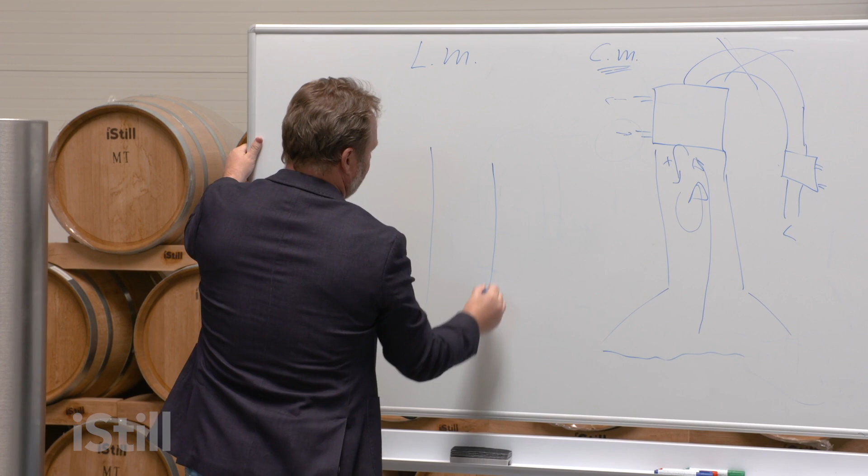What we basically did is we got rid of this whole gas throughput phase. We beefed up the capacity of the dephlegmator, and instead of calling it something stupid like dephlegmator, we called it what it is, column cooler. So we have a column, and we put a cooler on top of it, water in, water out.

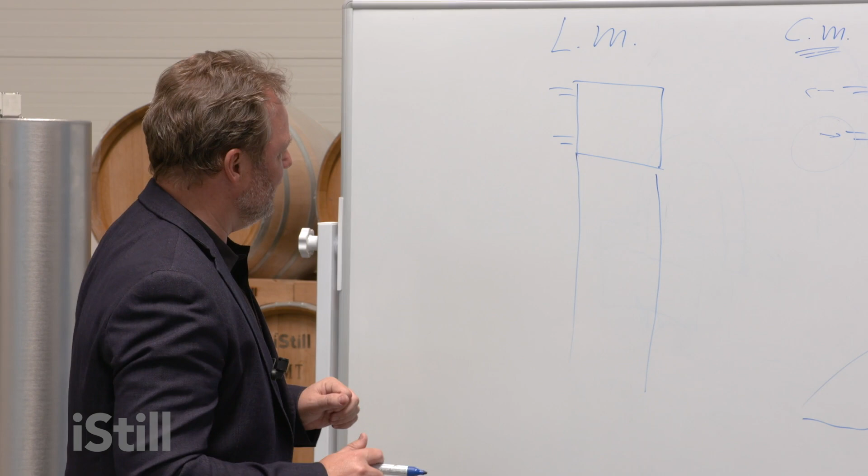And instead of sort of manipulating the water flow and hoping nobody has to go to the loo, hoping that the weather stays the same, hoping that the seasonal influences are minimal or brought under control, however you want to do that, we basically cool all the gases back to liquids. We cool all the gases that rise from the boiler in liquid management, in an iStill, back to liquids. That means that cooling is only essential in the way that there needs to be enough cooling to cool all the gases back to liquid.

How warm the coolant is doesn't really matter. Well, if it's colder, it's more efficient. You need less coolant to cool down all the gases. But even if the coolant is warmer one day or one season than the other, it doesn't have an influence on flavor. And it doesn't have an influence on flavor because we're going to cool back all the gases to liquid. How about room temperature? Variety. Doesn't have an influence either.

Wow, how about pressure? How about somebody flushing the toilet again? This is the last time I'm going to name that example, by the way, and my water pressure drops for 4 or 5, maybe 6 seconds. Who cares? As long as there's enough coolant in the system to cool all the gases down to liquid again, we don't have any variability.

That leaves, if you listen carefully, only one influencer, potentially outside of control, that influences cuts, that influences flavors, that influences vapor speeds, and that influences the quality of the product you can make and the repeatability with which you're going to make it. No more cooling temperature difference, no more distilling hall temperature differences, no more coolant pressure issues. So 3 out of 4 variables, muddiers, are thrown out of the window. We only have one left, and that is air pressure. Remember, we spoke about air pressure being the 4th variable that messes up

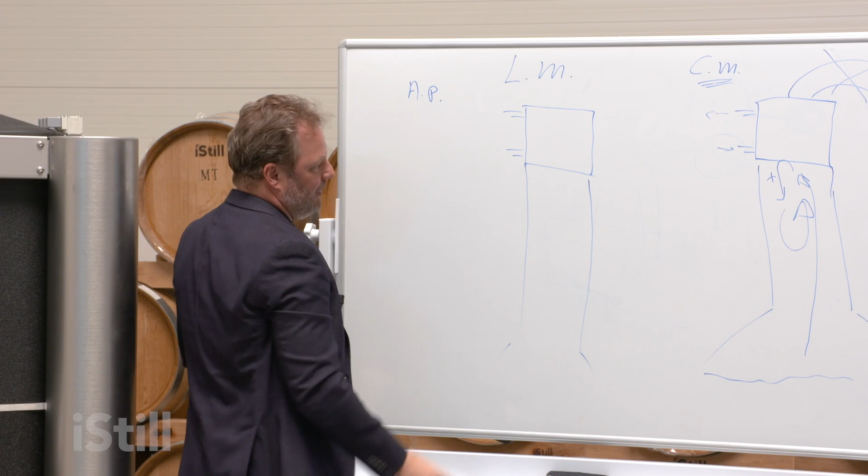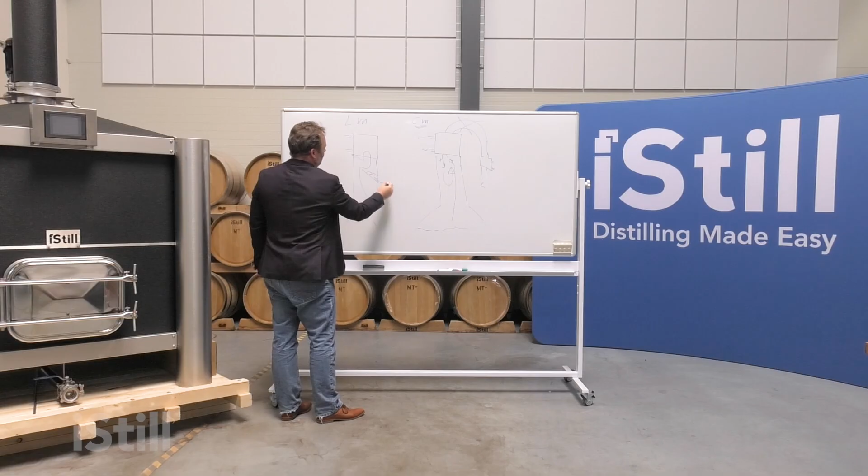All right, gases rise up, hit the cooler, everything gets cooled down. So what we basically need is a system to scoop up the liquids. The gases flow through, and the liquids assemble on the plates. So instead of having gases come out and cool them back, we have liquids come out. And what we pretty cleverly did, if I may say so, is we put a robot here. And the robot closes and opens a valve in the liquid outlet.

Now imagine that we close that robot. No liquids get out, so this plate fills up, overflows, and we get a redistillation the same way we got a redistillation in a more traditional system with cooling management. So all of a sudden, close the robot completely, we get pure reflux, nothing comes out, we can get a very high proof, lot of purity. Push the heads and tails away, make a very pure product like a vodka.

Or we can open up the robot completely. All the liquids that we create go out. What we basically now have is, instead of a vodka still, a pot still. It does one distillation, just like the traditional pot still that I sort of drew before. But the fun thing is that we have got a lot of control over that robot.

What we basically can do is open and close the robot in 2,500 steps between fully open and fully closed, creating 2,500 positions of a certain amount of product coming out and a certain amount of product, reflux, being redistilled for higher proof, better separation, less smearing, more purity, higher ABV. No control issues, no external influencers, basically, and I'm going to show you the unit for a second here.

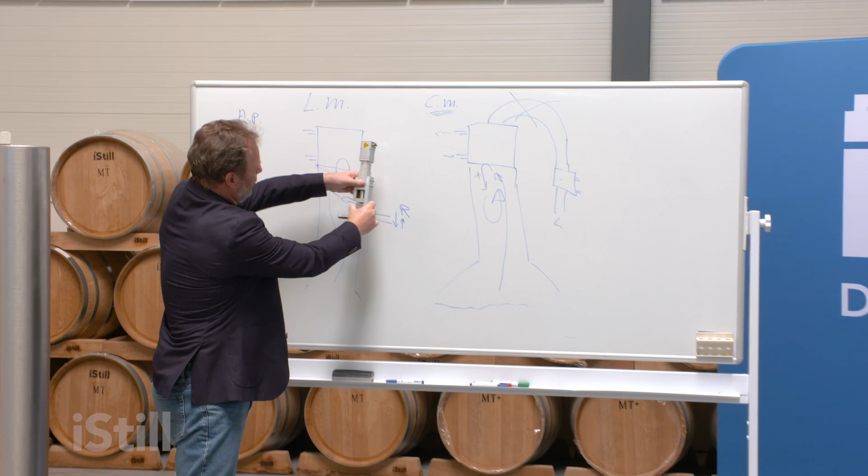A very simple robotized design that sits to the side of the column, and of course it's packaged when you get your iStill in, so you don't really see it, it's covered up. But basically imagine that the liquids flow out here and then go to your product, your cut selector, heads, hearts

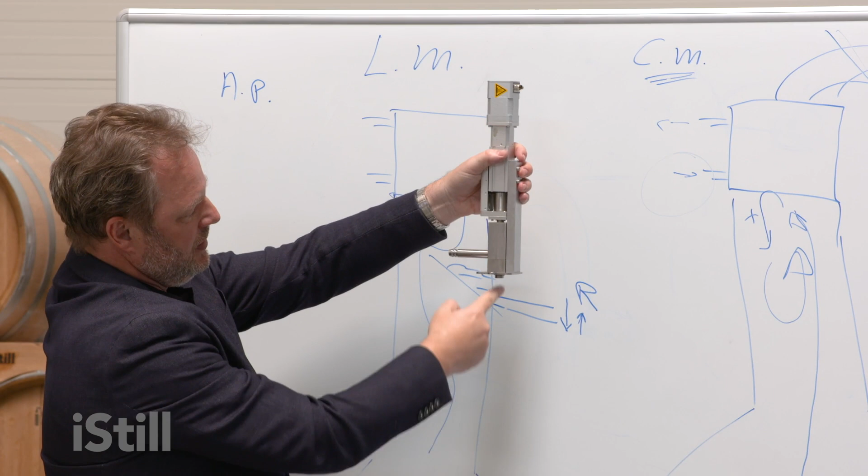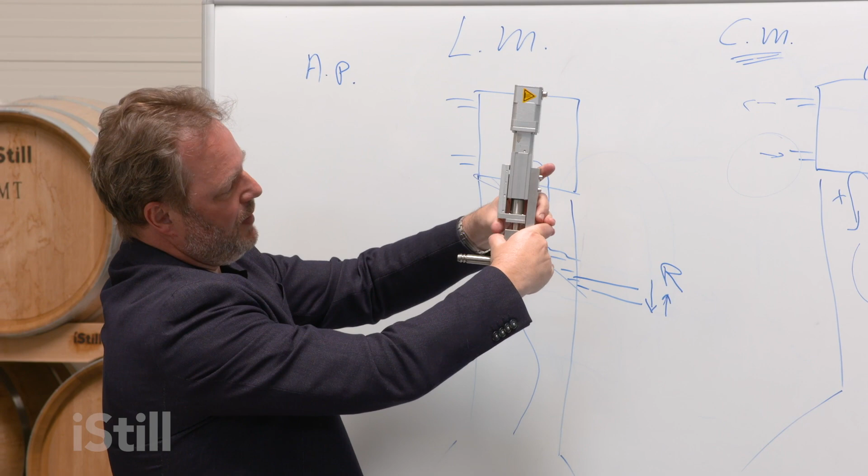and tails. But if we close this or open it, we can actually manipulate in steps of 0.01 millimeters the amount of redistillation we need and the amount of product per hour we get out. So there's a few advantages there. Cooling, water cooling medium doesn't have an effect anymore. So the number of confounders goes back from 4 to 1, only air pressure. So it's easier to create better product consistently.

But also because the robot has such a tremendous range, this will never be a pot still. You need to sort of take the plates out for it to function like a pot still. You need to completely turn this off to have it something like a pot still. This is simply a pot still if you open the robot. If you want to turn this into a vodka still, you need to make the column very, very long for a lot of redistillations, a lot of separation power, a lot of control over the final vapor speeds to make sure you don't get heads and tails smearing and create a one-dimensional vodka.

With this system, you don't have to change anything. The column stays the same, the robot stays the same, but based on your instructions, it will just close a little bit more to make sure that it gets to the purity where it needs to be. So the range in which the liquid management robotized system works, really modern equipment, 21st century, is much wider, much broader. How it helps you target to get the same product over and over again is really ×4 compared to the difficulty of a cooling management system. And that is why I don't like cooling management and why we designed our own system.

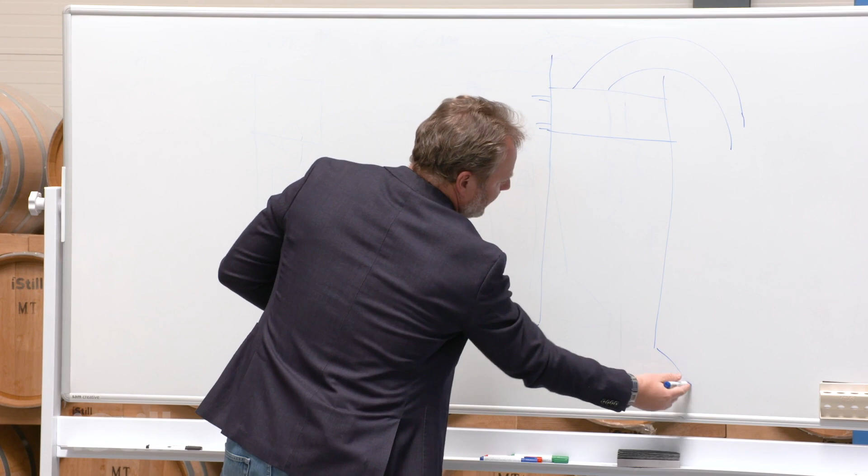And let's start with the more traditional approach. Right, the white column for the fruit brandy, the dephlegmator that sits here, and then the gases that are allowed out. What happens to the reflux? Well, traditionally what is used is a plated still. So you have to imagine that inside this still, let's just draw there are three additional plates. Now, if these were solid plates, the gases wouldn't be able to rise up from the boiler. You would create pressure issues.

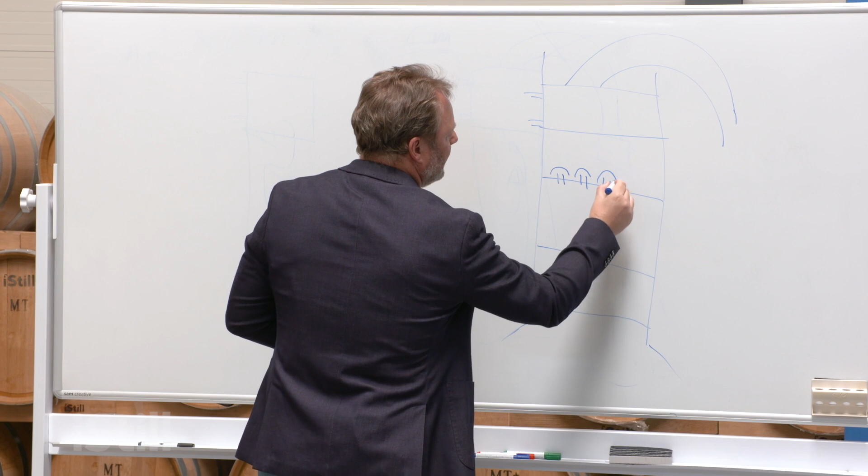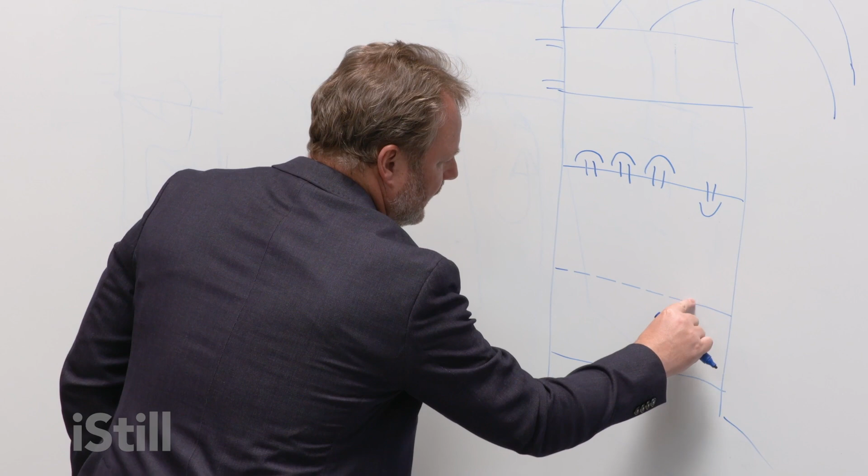So what they basically do is two things. Either put bubble caps on them, or, and it's either one or the other, but I'm going to draw it in one design, create little holes inside the plate. Let's say this is easier to make, that this system has two perforated plates and one bubble cap plate. Now normally your system is going to be either bubble cap plates or perforated plates, but since their workings are pretty similar, with slight exceptions here and there, I want to draw them in one machine.

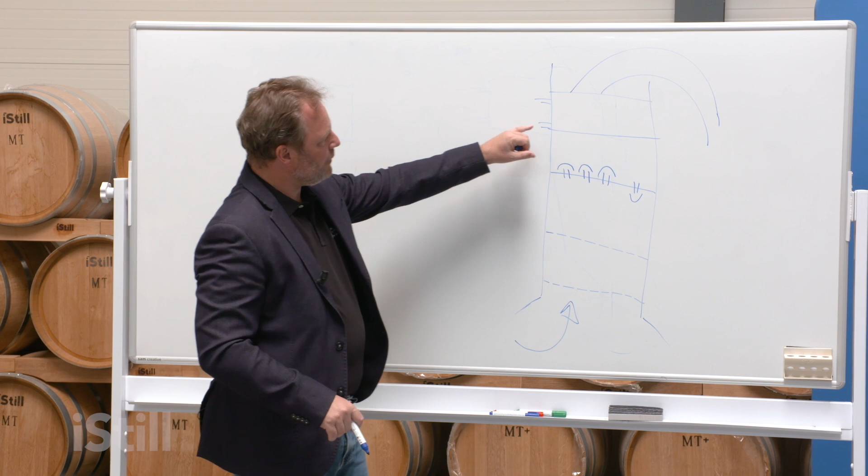Now, since there's holes in your perforated plate, all of a sudden the gases that rise up from the boiler find a way through. But because those holes are small, the moment we put a dephlegmator on and we start cooling, remember, traditional system, we create reflux, liquids that fall back.

And what happens to liquids that fall back on these plates with perforated holes? They can't drain that easy because, well, the holes are small, right? So there needs to be a liquid buildup to create enough liquid pressure to push liquids back to the boiler. So basically, by creating perforated plates, we create a hold-up situation for the liquid.

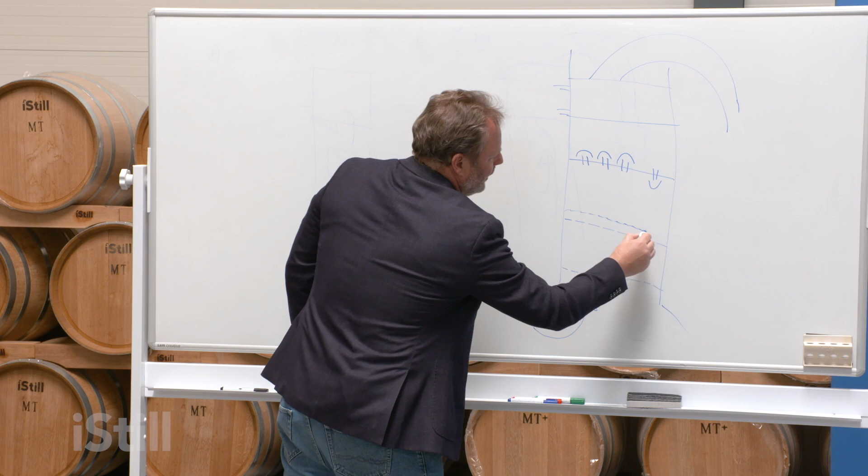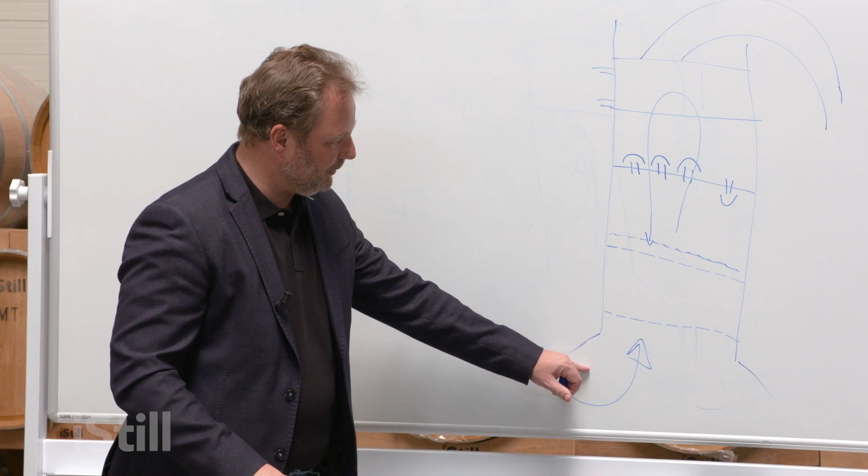So whatever we cool as gases falls back and creates a liquid bath on top of that perforated plate. That liquid bath is kept in place by the gas pressure, the vapor pressure from the boiler. So basically, the moment we stop distilling, we turn off the heater, we turn off vapor creation, these liquids will drain.

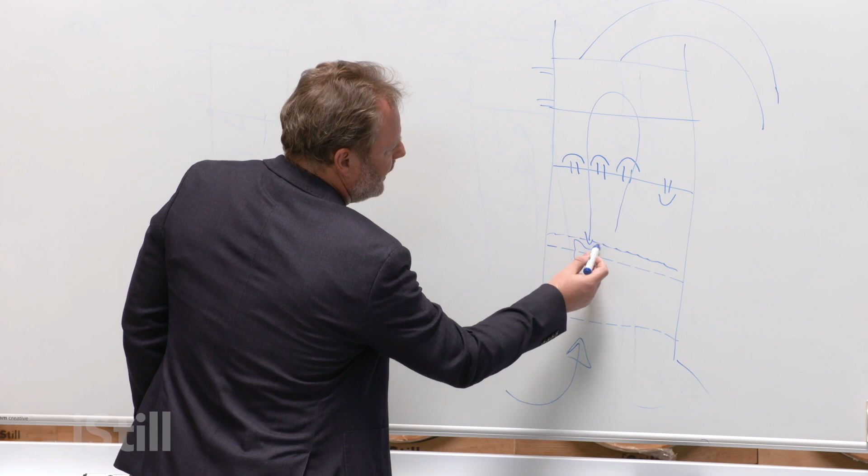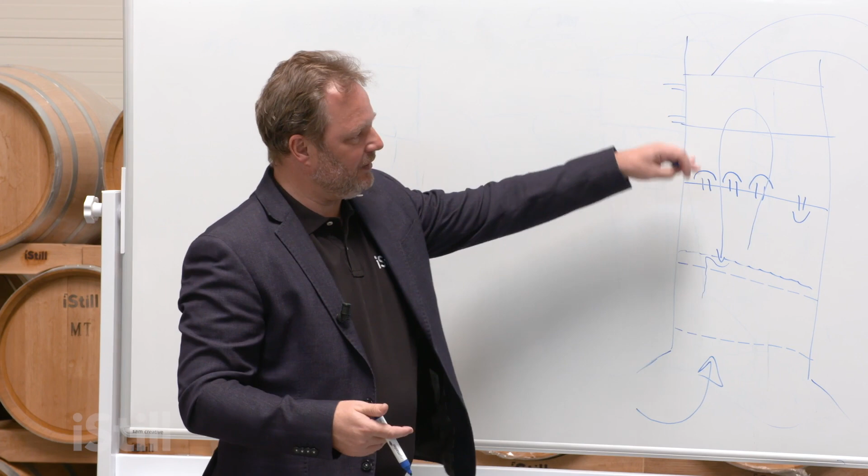But as long as we keep on distilling and have the dephlegmator on, what basically happens is that the gases that have to now come through have to find a way through that liquid layer. And in doing so, they exchange energy, and guess what? They lose energy. So the ones that go up to the next plate, in general, are the lighter fractions, the low boiling point alcohols.

By redistilling, creating more plates, more redistillations, by returning reflux that we create with, in this case, cooling management, what basically happens is that we redistill. One distillation in a pot still, but with a plate, we add a distillation cycle. With two plates, we add two distillation cycles. With 3, 4, 5 plates, all of a sudden we do 3, 4, 5 distillations in one system, as long as we create a liquid layer on that perforated plate.

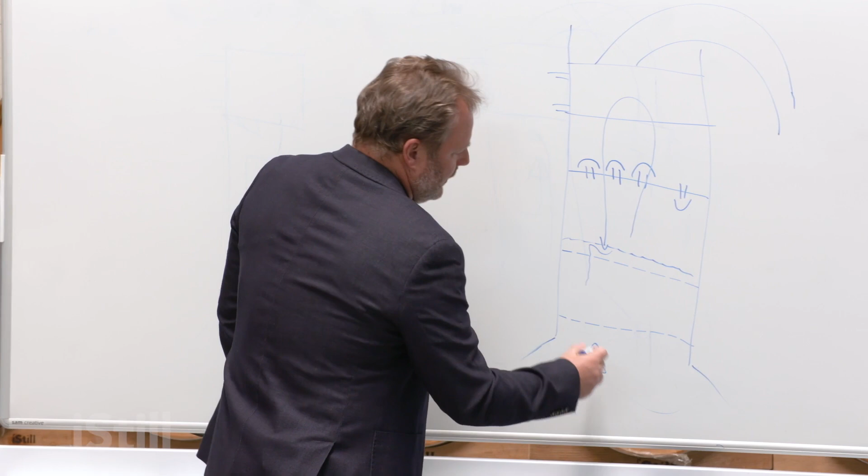You can imagine that the rise up of gases through that layer of liquid that creates resistance is not a gentle process. So you see a lot of boil up, a lot of action going on. So these stills traditionally have little windows where you can look in and see what goes on inside. And you see all the activity on the plates and liquids bubbling and boiling. And you think, wow, that looks interesting. It's really separating, and it really is separating.

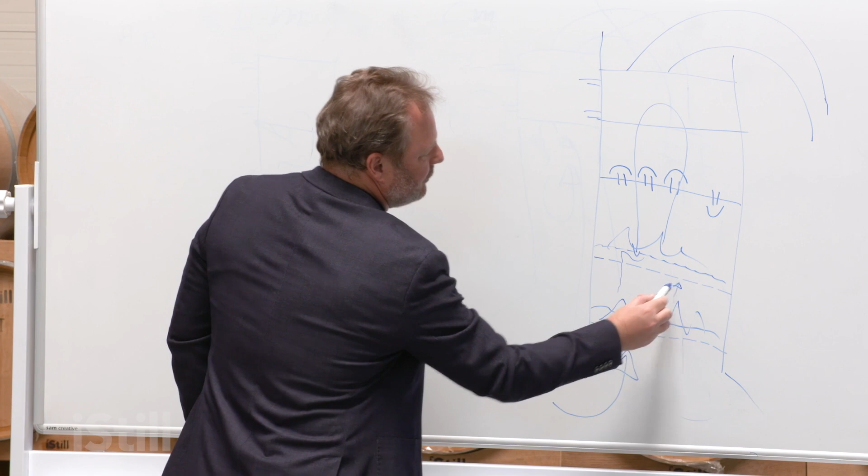But this also creates an issue, because as these droplets shoot up, they have a tendency of infecting the next plate. Perforated plate, bubble plate as well. And that means you can get something that is called entrainment, where instead of gases moving up from one plate to the other to become more purified, we also now get sometimes droplets of liquid traveling up, contaminating the next plate up. And this is an inefficiency.

And to compensate for that inefficiency, there needs to be a lot of space between plates so that the droplets that form fall back on that same plate instead of travel up into the next plate. Entrainment prevention takes place by creating a lot of space between the plates. And that's okay with 2 or 3 plates, but now imagine that you're height restricted or money restricted and you want to make vodka. You need to do 14, 15, 16 redistillations. Maybe you need 14, 15, 16 plates.

Maybe you need 14, 15, 16 feet, 5, 6 meters of column on top of your boiler, or maybe next to your boiler, which is not very efficient either, in order to hit your desired outcome percentage. It's an old technology, right? 1870s. This is the fruit brandy still, traditionally.

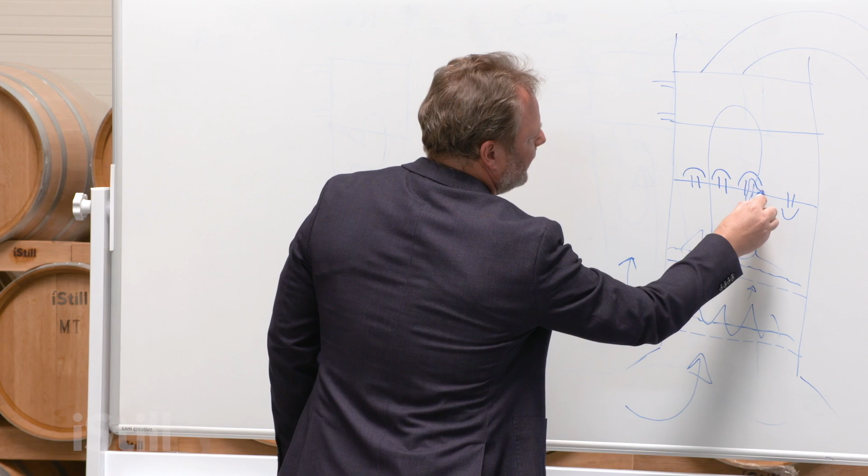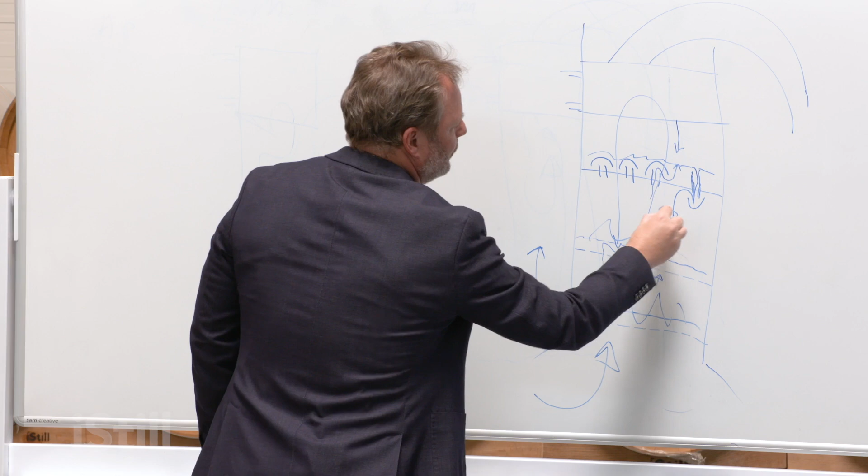The difference between the perforated plate and the bubble caps is that with the bubble caps, the gases go through these little mushrooms and then like that. So if we start to cool, liquid falls down, we get a liquid layer, we have one mushroom upside down so that if the liquid gets too high, it overflows and goes back to the other plate. So the difference between a perforated plate and a bubble cap plate is basically the fixation of the liquids.

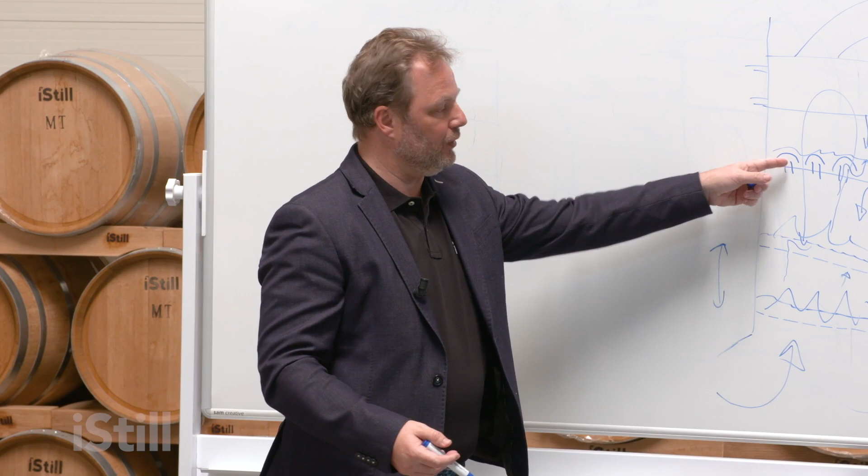If you stop distilling with a bubble cap, there will always be a layer of liquid left on your plate. The liquid layer is independent of the vapor speed, the pressure from the gases from the boiler. It doesn't automatically drain, which means it's more difficult to clean, but it also means something else. Bubble caps were invented together with the dephlegmator, again in southern Germany. You can still see that the players on a national, international level all come from southern Germany, fruit brandy country.

Because what those layers do, especially the very fixed layers, like on a bubble cap, is they prevent tails from coming over to the next plate. As long as we don't get entrainment, no droplets making it over, what basically happens is that we create a liquid lock that prevents tail smearing. Because on the lower plates, with the higher temperatures, still a lot of water in the alcohol mix, not very pure yet, the tails simply cannot make it over to the next plate.

The real reason why bubble cap plates and cooling management were designed and why they were invented in fruit brandy country was simply because the fixed liquid layer is a perfect tails trap. You remember the two-dimensionality of fruit brandy? How we don't want any tail smearing because it will overpower the fragile flavors at the front end? That's what you need.

But now, you look at your own still, or you think back about the talk you just had with a salesperson from one of those companies, and you're like, so why the heck am I buying this if I want to make whiskey? And that's a good question. Because what nobody tells you, but I feel you should know and understand completely, is that if you buy a fruit brandy optimized system, it's optimized for a two-dimensional front-of-mouth product. This product is not suited for whiskey or rum or gin, and basically not allowed for vodka anymore either.

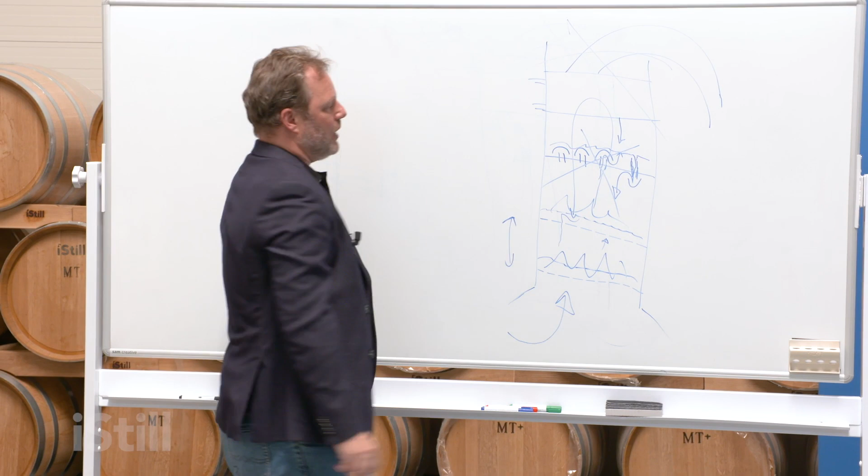Guess what we did? We got rid of the cooling management. Our plated stills are liquid management driven. They have the robot in there that really securely manages the amount of reflux that goes on the plates. Benefits of both worlds? Yeah. Bubble caps, no go. If you come here and say the only thing I want to make is fruit brandy, maybe we'll make it for you. But I prefer, if you want to go plates, perforated plates. And the reason why perforated plates are better is that they allow for some smearing.

It won't give you a three-dimensional product like the robotized version I showed you earlier. It won't give you a full-bodied flavored rum or whiskey like a traditional pot still. But it will give you at least half a dimension, 2.5, where this technology only gives you a two-dimensional drink. Only one category benefits from that, and that is basically fruit brandy. So be careful, guys, because remember we talked about bourbon? Bourbon used to be a whiskey. By definition it is a whiskey. But if you taste it, it tastes like a fruit brandy.

There are still a few bourbons out there that are actually made on pot stills, and you know which ones I talk about. Try them. They've got three-dimensional tastes and flavors. They last in your mouth for a very long time. And nowadays, most bourbon, I would say about 90 to 95%, is distilled with fruit brandy stills. And guess what the outcome is? Two-dimensional whiskey. If you like it, no problem. But call it a bourbon. It's not really a whiskey anymore. Not in its flavor profile, not in its definition of where it sits.

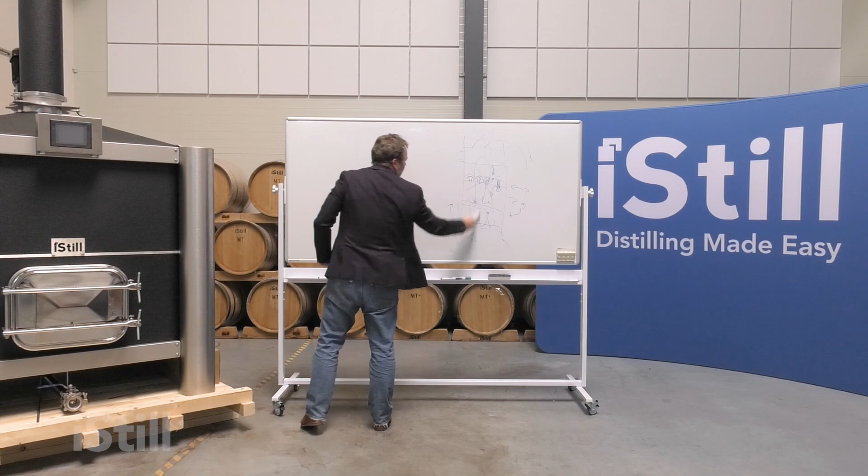90% open space. What that means is that if we fill a column, not with this technology, but basically with springs, what happens is that in that column, there's a lot of springs there. I can't draw them all, but imagine that it's full with springs. It's 90% open. So all the gases rise through, no problem.

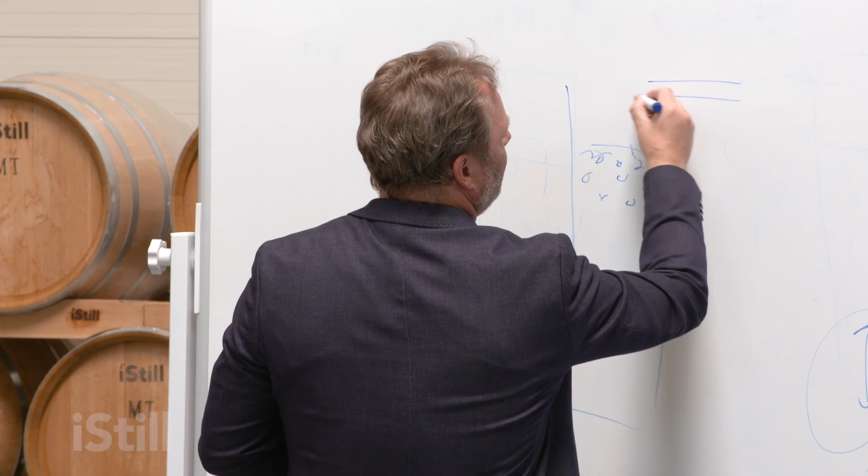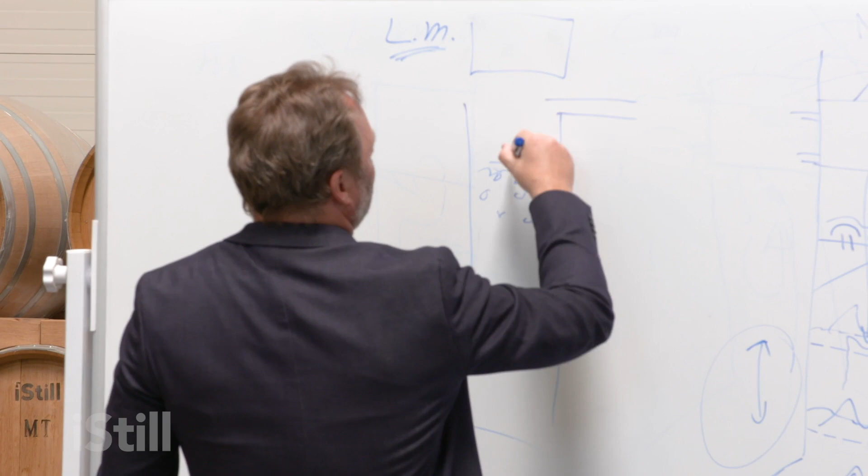Remember that robot? If we've got it full open, we've got that column cooler here, because we think liquid management is, well, it's not actually an opinion. We don't think that. We know that liquid management is a much better management technology for you to create quality products over and over again. So let's say the robot is open, everything gets scooped out and goes back. We now have a pot still.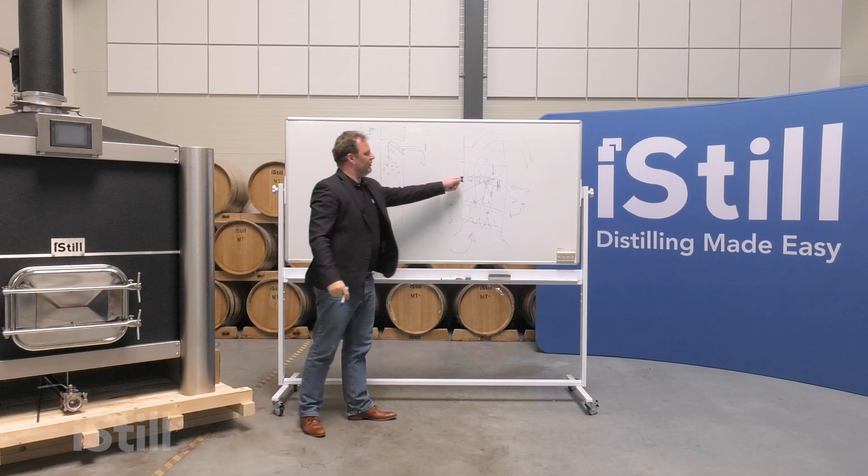If we start to close the robot and reflux starts to return from the plate back to the column, instead of having plates there, I mean, we have a plated column. I explained that to you because 50% of the market loves those machines, and if you already have one in practice, you don't want to upgrade to a new technology, you want to stay close maybe to the old technology, we have it in-house. But if you look at a system that is more efficient and more variable, you don't need plates at all, you just need these springs in there.

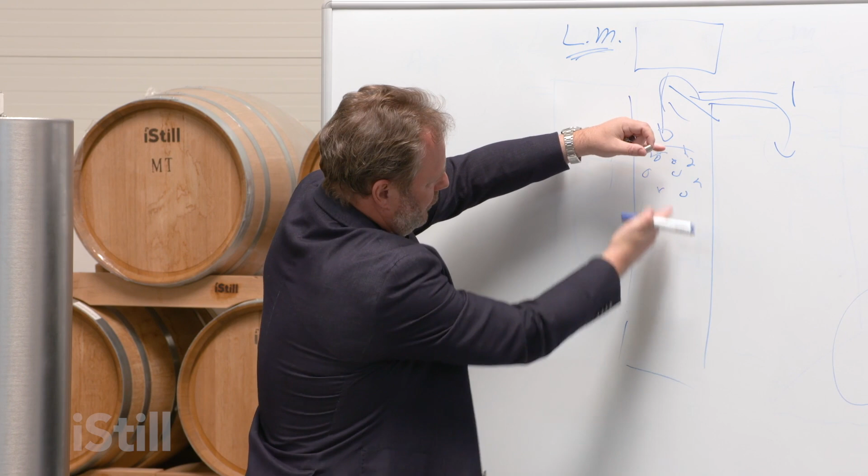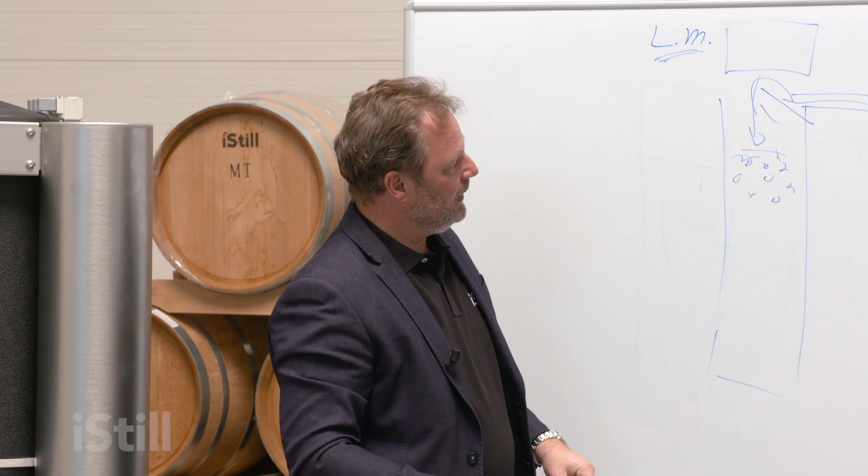The more you return, the more of a portion of those springs are filled up with liquids. So we create a flexible liquid bath, like with the perforated plates, instead of a fixed liquid bath. But it is not limited to the number of perforated plates. Basically, you can put a large portion of the section into a liquid bath if you need a lot of redistillation for vodka. Or if you simply want to do a pot distillation, you don't return any reflux, all the product comes out directly and immediately. No liquid bath, pot still run. Vodka run, pot still run.

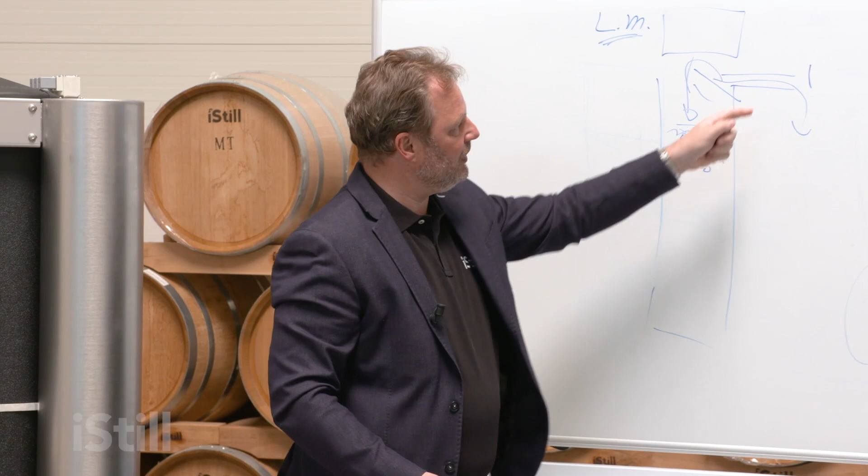And the fun is, you don't need to take anything out from these springs. Basically, by changing the setting of the robot or choosing the automated program that actually manages the robot, whiskey, vodka, gin, this system will automatically make sure that there is exactly the right amount of liquids, the right amount of reflux in your system in such a way that you get the exact purity and flavor profiles that you need. And that's another invention that we did and we're pretty proud of.

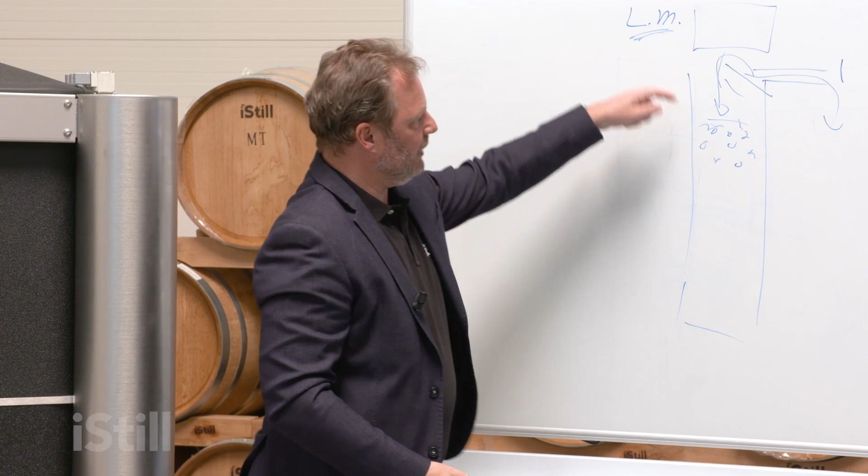The advantage is that instead of having a column that is like 5, 6, 7 meters tall, 25, maybe 30 feet tall, we just have a column that is 1.5 meters high at max, which is under 5 feet. And it can do anything. Pot distill, double distill for a whiskey, triple distill if you want to make a lighter style Irish whiskey, or 20, 25, 30 redistillations if you want to make vodka.

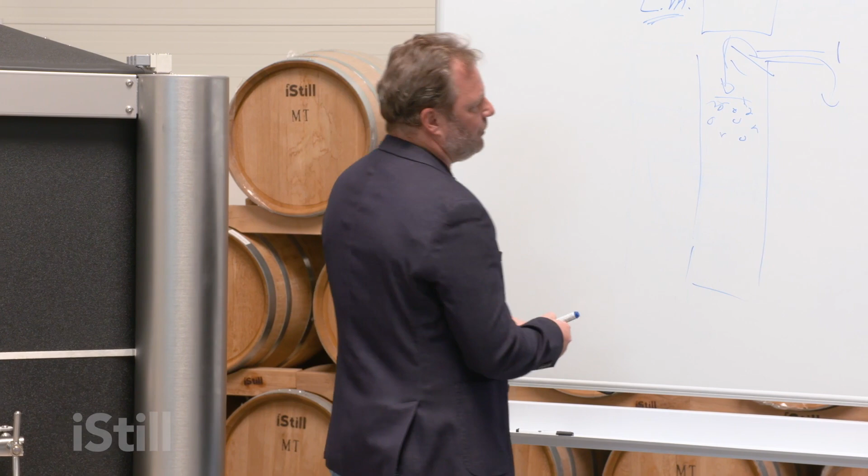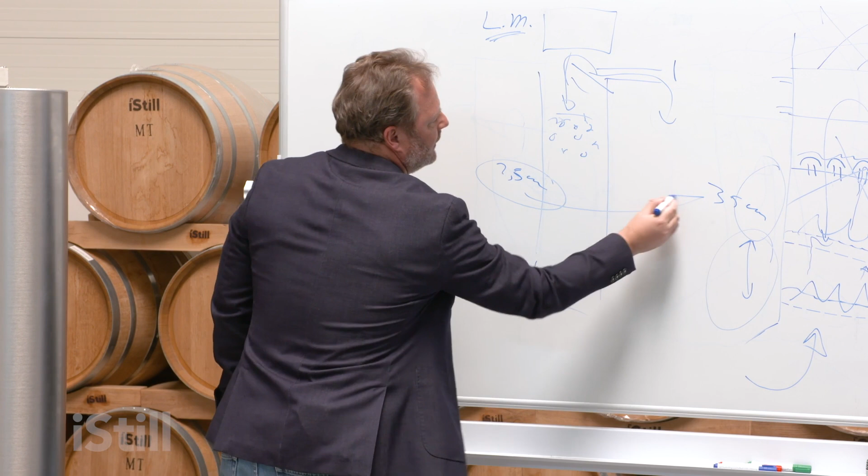With our solution, the springs, Helicone column packing is what we call it, we can get a redistillation not every foot, not every 30, 35 centimeters, but every 2.5 centimeters. And that means it's like 14, 15 times more efficient at separating than traditional systems are. Not taking into consideration the amazing robot, not taking into consideration that liquid management already gave you a huge edge.

Pot stills don't have any packing because there's no reflux management, there's just power management, right? This is the first thing that we spoke about when we dived into the first part of still design. Fruit brandy stills, plated stills have power management and traditionally cooling management. I explained to you, or tried to explain to you very carefully, why cooling management is a very compromised solution and really not the way forward, and instead liquid management is a much better, a much safer, much more pinpointed and dedicated solution in any product.

Third consideration I want you to think about is, do I need plates and what kind of plates? If you want to go fruit brandy, bubble caps is fine. Anything else, if it needs to be a plated still, perforated plates. And if you want to have more flexibility, make more products out of one machine, the whole suite, the whole range, you need a packed column with liquid management and robotized and automated controls over it.